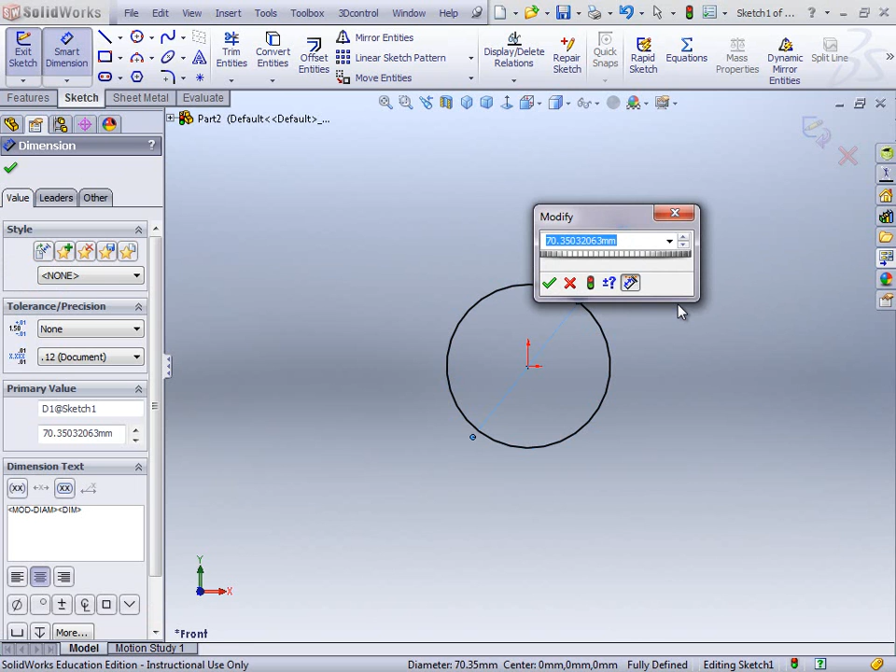So we pop to our front plane, create a sketch, dimension it 63.5, and extrude it a distance of 25.

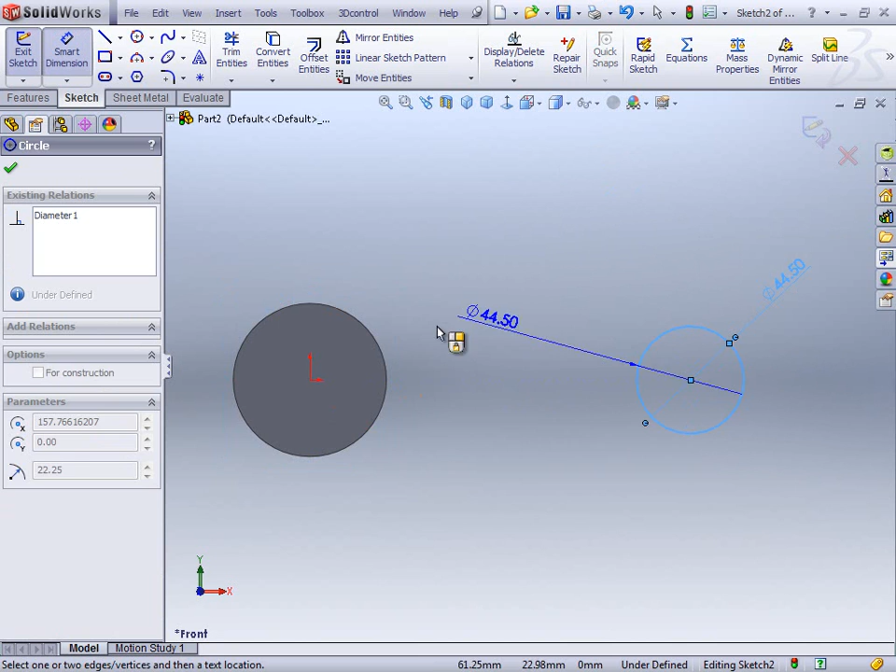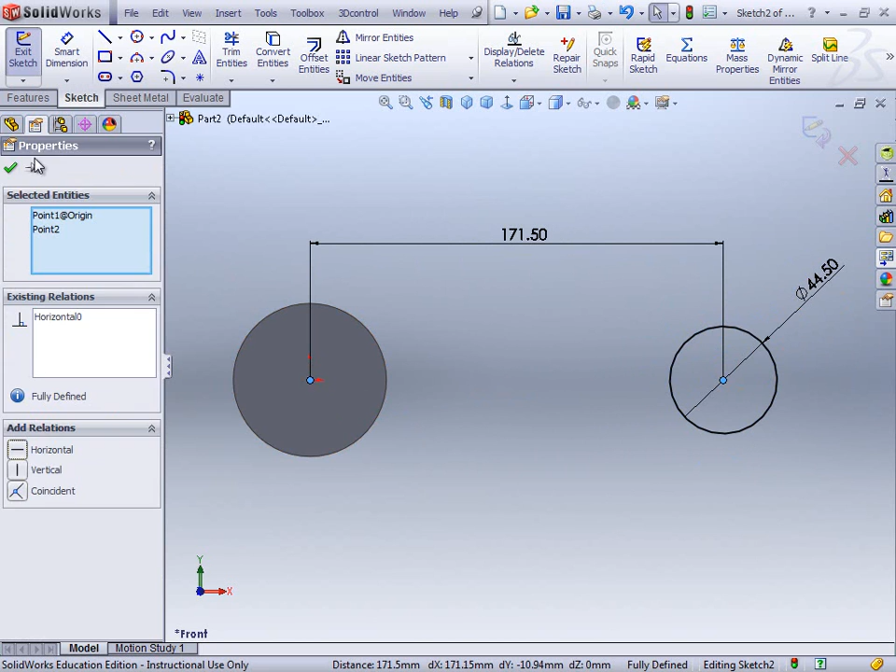Create another sketch on the front plane. 44.5 diameter and 171.5 distance, and then just pop it on the same plane as that, so we can select that point and that point and make them horizontal to fully define it. And now extrude this one a distance of 22.

So you see at this stage now we've got two solid bodies, boss extrude 1 and boss extrude 2. We need to get those merging into one body, if you like.

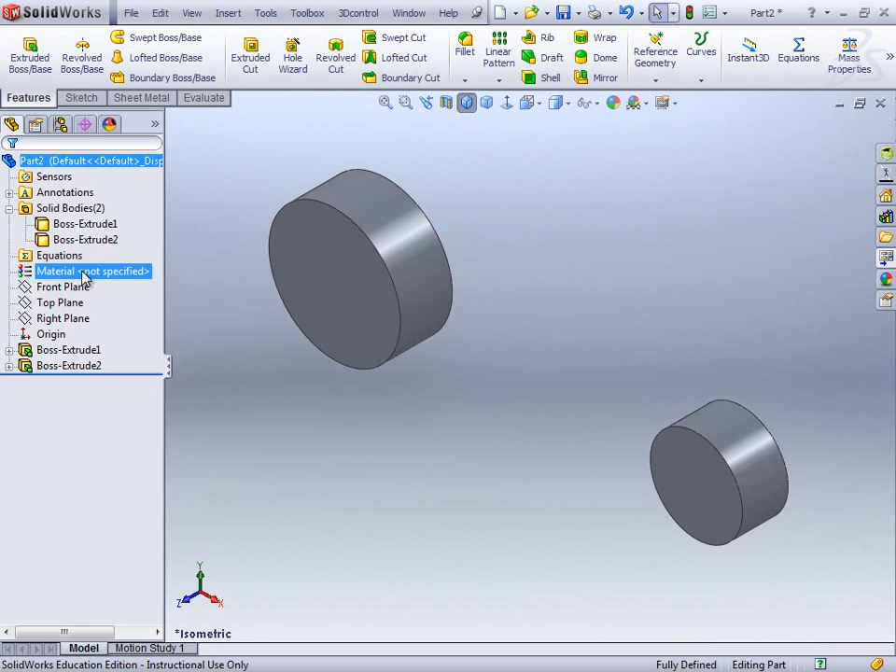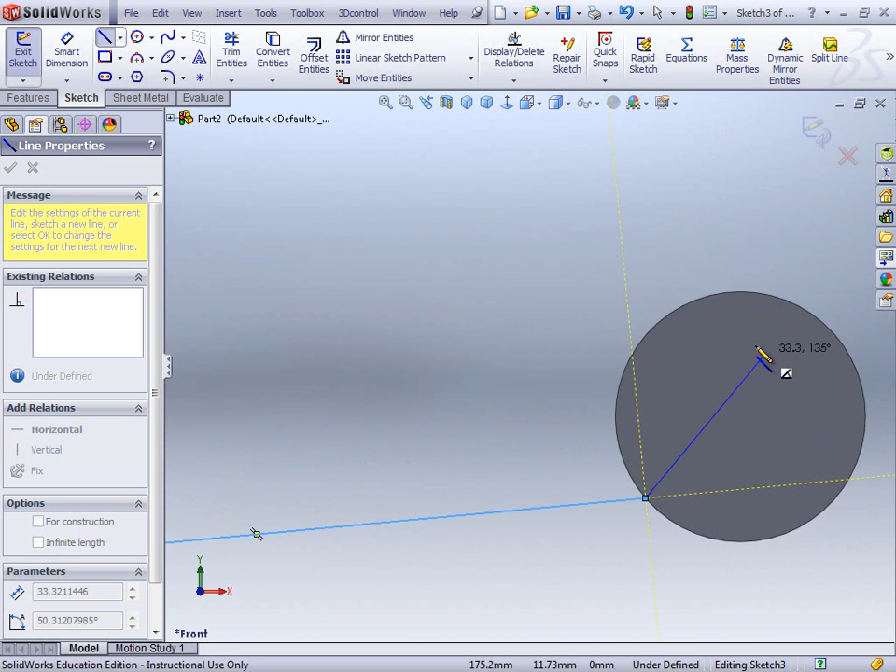So again, if I create a little bridging piece now, if I go to the front plane and sketch, normal to, and if I draw a line from there to there making it vertical, approximately there, and again make it vertical, so I get it vertical, and then close it off.

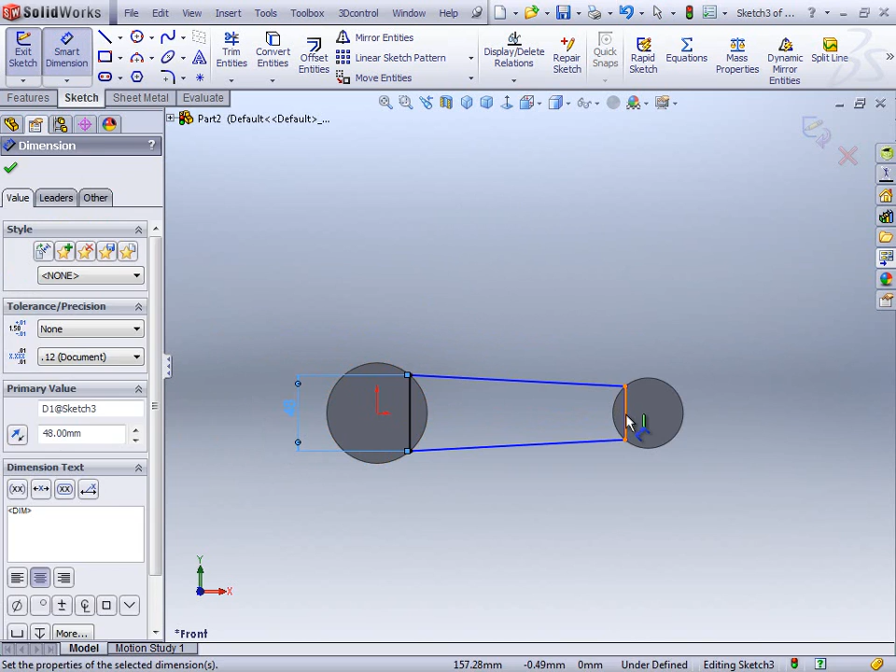So that's my line. You can see this is kind of trapped to the outside rim of that disc. Same with this one. We just need to pop in a couple of dimensions now. So this dimension is going to be 48, and this one's going to be 32.

And now if I exit my sketch and extrude, this time it's always by default ticked on merge results. You might have noticed it as we were doing the other ones. Even though we couldn't merge them, it was still kind of checked on. It is always by default on, but just always check that merge results is on. You can uncheck it if you wanted to, and we'll see an example later on where we mightn't want to merge results. But if you want to merge them, make sure that box is ticked.

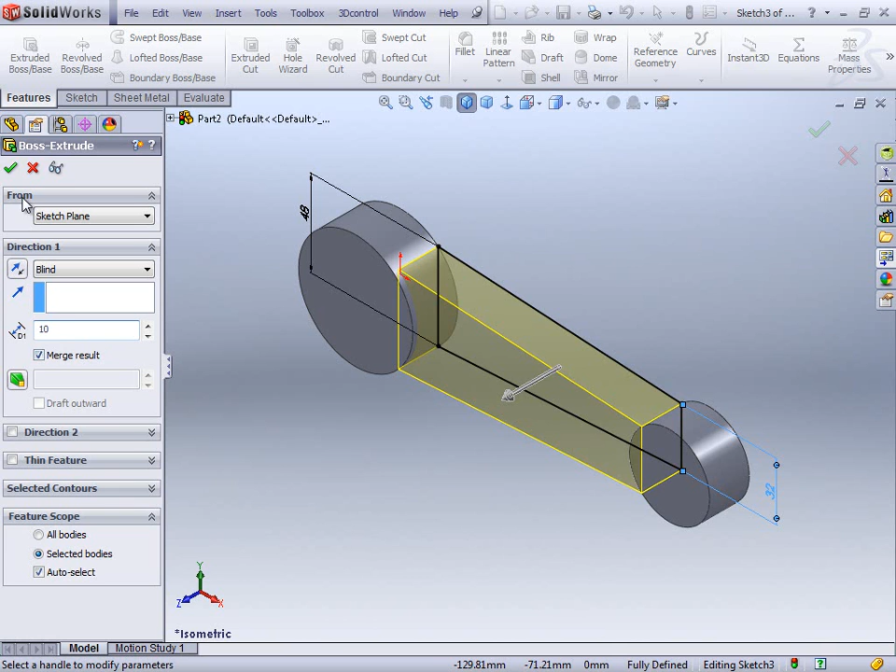So we're going to extrude this a distance of 10. Click OK. And now if you notice, my solid bodies folder is gone. I don't see it anymore. So that tells me that it's actually one solid body.

If you just wanted to check that out, we can go to options, feature manager, and if you look here, solid bodies folder comes on automatically. You can actually show it if you wish. So if I click on that and just show it, you can see it's got one solid body, boss extrude 3, called the last one we've done, so that's consumed everything.

So we've got just one solid body. Now I wouldn't put that folder on. I kind of leave it off. Well, not off. Leave it on automatic, so it comes on automatically.

Which you can see here, a lot of the little folders that appear in the system show up automatically or by default, so you can pop in here and change that if something comes on and you don't generally use it, like maybe sensors. You could maybe turn that to automatic or off, and various things. One you might turn on for later in this course is the equations one. I think that's automatic, so you might just put that one on and show that one, because that's handy to have showing up in your feature manager.

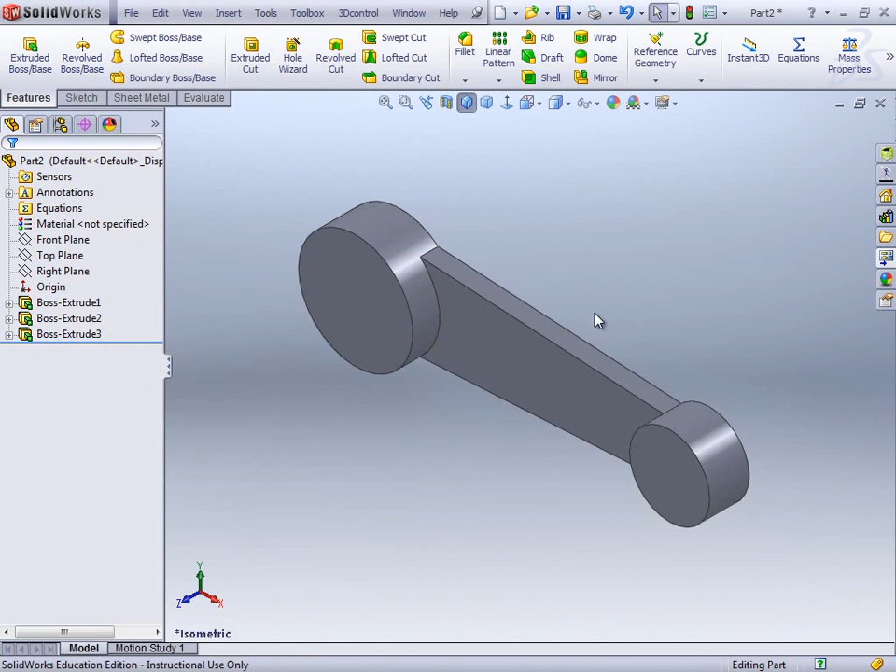So if I just finish this one off now with the rest of it, I just want to do a sketch on this face. Probably not something you'd do normally, you'd probably do them separately, but just to get it done a little bit quicker, I'll do the 2 circles at once.

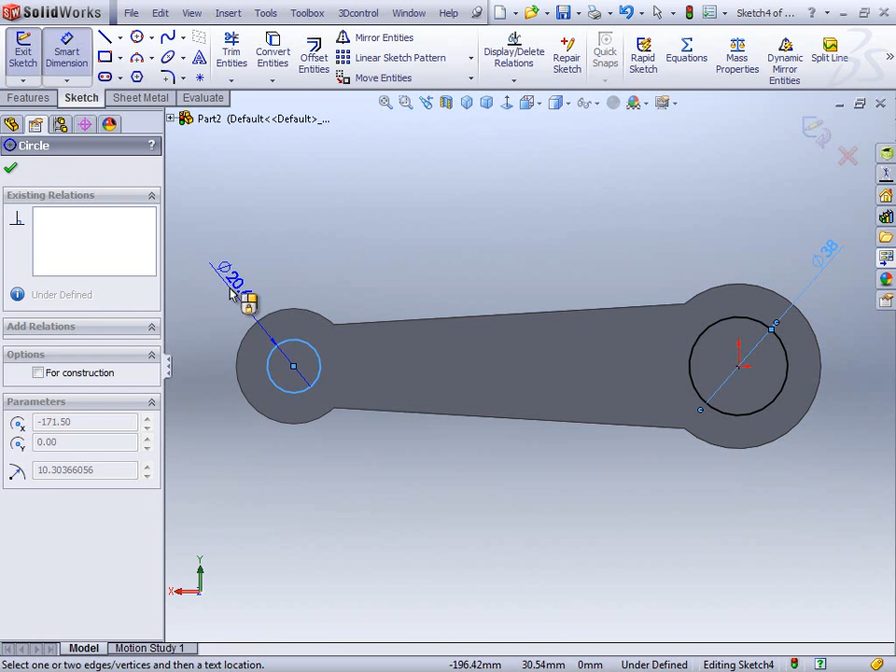So that one is 38, and this one is 20, and we do an extrude cut through all.

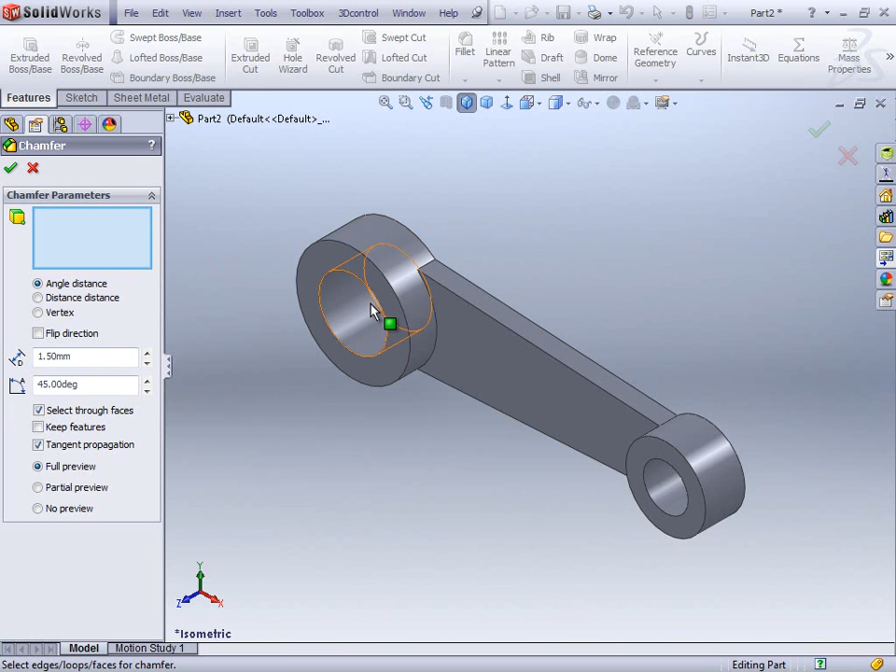Now we pop on a couple of chamfers, and the chamfers are 1.5 by 45, so 1.5 by 45, and pick the 2 front and back edges of that, and click OK.

Okay, if I put on the fillets now, so if I put on a 3mm fillet here and here, and apply that, and then pop on the fillet there and there, apply that, and then pop on the fillet on the back and apply that.